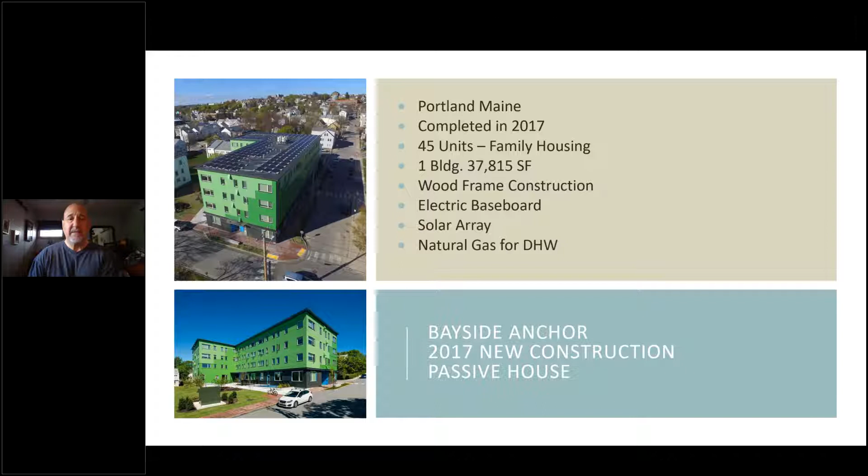So the first thing I want to show you is a building that was built in 2017. This is a passive house building in Portland, Maine. It's a 45-unit building, and it was the first passive house that was done in Maine, in Portland, and the first passive house certified that Avesta had built. And so after 2017 and 18, I tracked the performance. I wanted to look, if you can see on the top right, at the PHPP, which is the passive house estimating program, to see how much they estimated we would use in a year, and then how much natural gas we would use. That's for the hot water.

And on the left, I started breaking it down by cost per watt, by therm. This was what we were spending on electricity and for the natural gas. But where I highlighted is the most important for this conversation. We were seeing on average that each apartment was using about $69 or $70 of cost all in: plug load, heating load, cooling, and hot water.

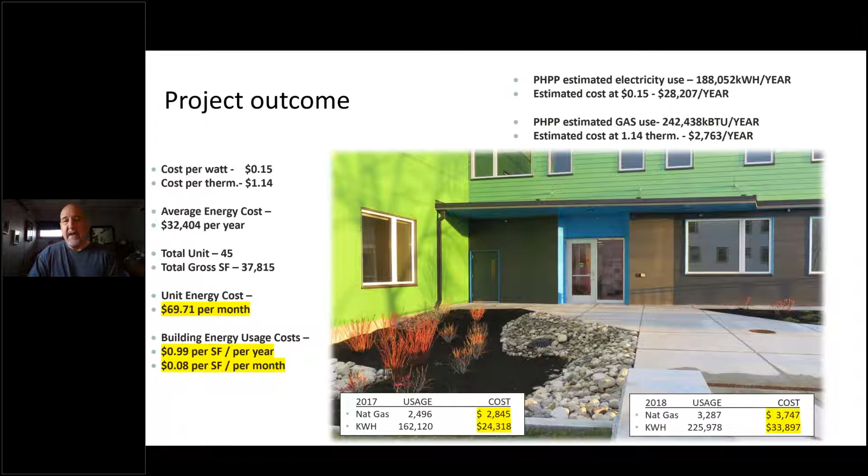If we break it down by square foot, it's about 99 cents per year or 8 cents per square foot per month. It was very interesting. So then I looked at another building. It was a different design, LEED. And this was in Gorham, Maine. It's a little inland, but basically it's in the same region, Maine.

And this has a different approach on how they model, but the goal is to be the same, reduce energy consumption. And in here, it's also electric for the heating; the hot water was natural gas. And when I did the math for the 2 years, 2017, 2018, again, $70 a month. This is a senior housing building. The other one was a multifamily. And about 88 cents a square foot per year.

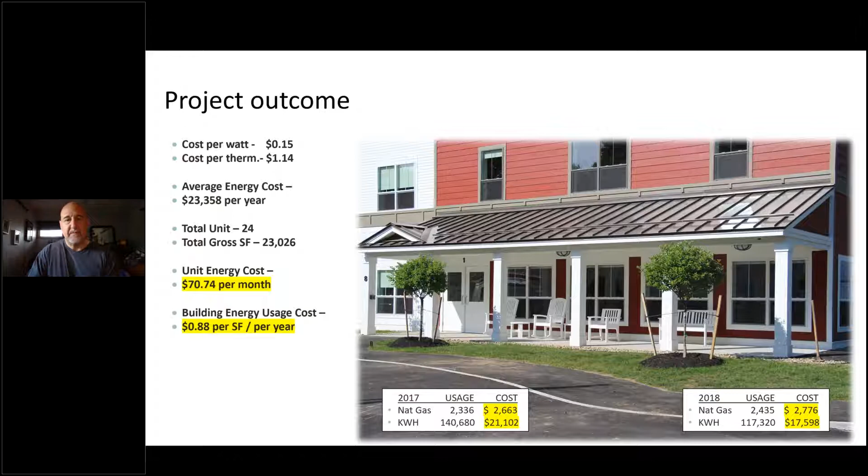And I said, well, what does that mean? These are nice numbers, but what does that really go against? Is it good? Is it bad? And so I compared those numbers of how I would operate both Bayside Anchor and Ridgewood 2 against the allowance from HUD, the US Department of Housing and Urban Development. This was done in 2019, this chart.

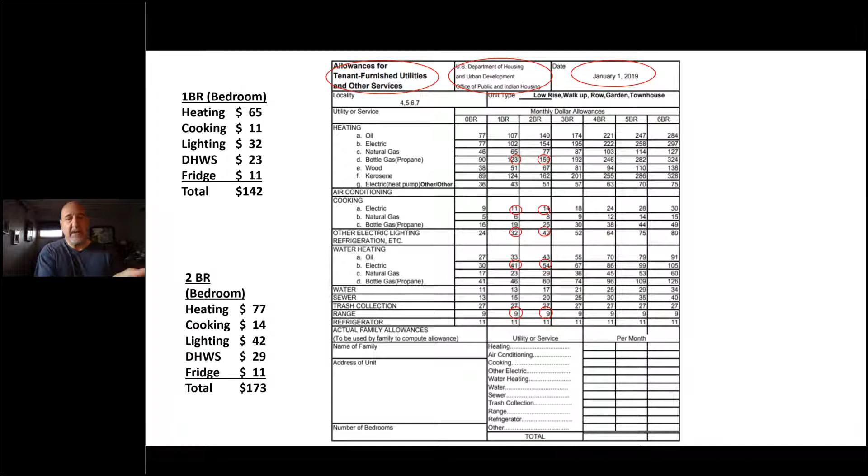What they estimate for an electric setup for heating, cooking, lighting, you can see it on the left. A one bedroom is approximately $142 per month. A two bedroom averages about $173 a month. That's the allowance that HUD would allow for somebody if it was an all electric building.

And as you can see, Bayside Anchor and Ridgewood 2 were half, almost a third of the cost of what the allowance was. And that's because HUD's information was based on the old way of building buildings. And Bayside Anchor and Ridgewood are based on the new way of building buildings.

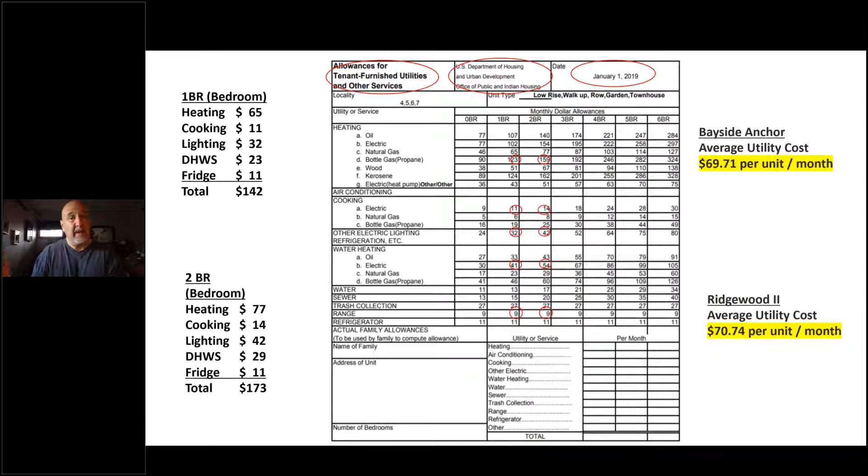So how are we going to compare the cost? Meaning I can see how Bayside Anchor works, I can see how Ridgewood 2 works, but can we compare all of our buildings? And also, how can we compare a good building versus a pretty good house or a code compliant? And so the Meadows at Grapevine Run fell into our lap. Of course, it was 3 years in the making, but this is a three building campus.

And the first of the three buildings was done basically code compliant. It had propane for heating and for hot water. It had nice insulation, double pane windows, pretty basic, but a good building. It was completed in 2017. In 2019, we were already in construction with two more buildings, exactly the same shape, size, square footage, number of units, but they were going to be passive house through PHIUS.

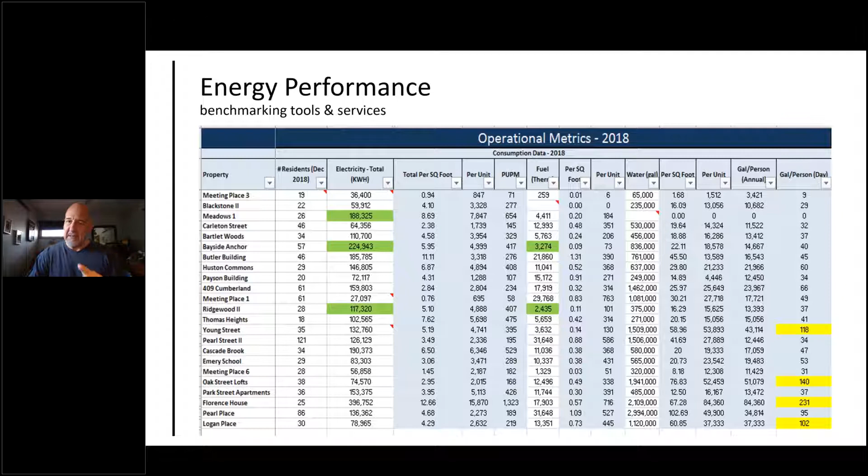We took buildings that were double corridor that were built over just a block of time to then start gathering the information on all of their metrics for operational expenses, square footage, electrical consumption, the hot water, the therms, the per unit cost, the water consumption, number of people living in it. We just started gathering information. And then we shrunk it down to 17 buildings over a 12-year period that were very similar in stature, double corridor buildings.

There are some that were senior, family, and Housing First. So they have different nuances. They're in different locations, but we just wanted to gather them to see what information we could find and how they compare with each other. As you can see on the left, in yellow, this is from the most recent at the time of this data mining, 2017, which means it was at least built and I had enough information to gather.

And the first thing we looked at was million BTUs per unit, and that's the middle of this document. But I want you to pay attention to the property names on the left, Bartlett Woods, Carleton Street, Bayside Anchor; they're all listed just by when they were completed. Over on the right, the building design: high performance, passive house, code, LEED. We categorized how these buildings were built based on the materials that we used.

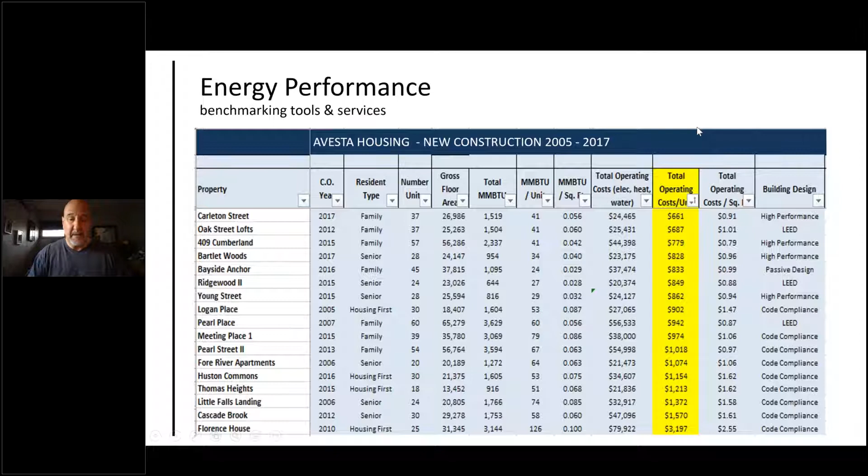And then finally, we wanted to show what is the total operating cost per unit. Same thing is going to happen. The properties change up and down. The numbers will show that high performance buildings perform 50, sometimes 75% better than the code compliant buildings.

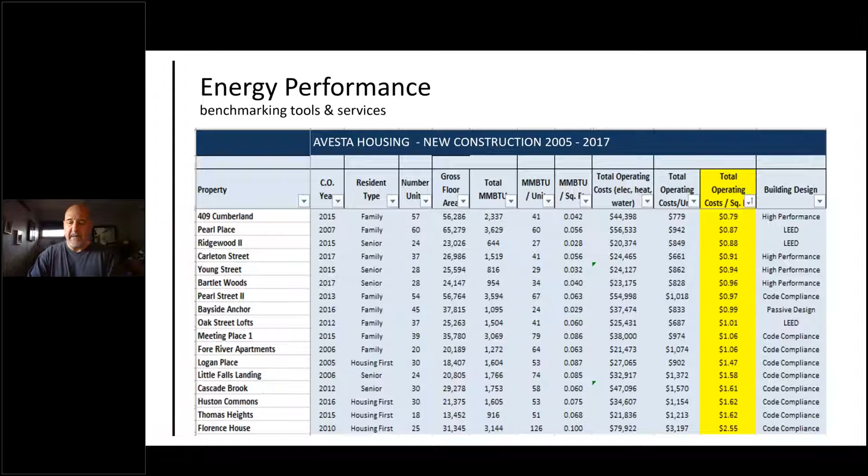So that was 2018, when I started doing this presentation. And I felt, how are we going to actually continue this story? Because one year could be an anomaly. And so, like I said, Nathan Howe and I have been staying at this for 3 years. And we have our own jobs to do. I'm busy with project managing and helping buildings get built. Nathan is a development officer, making sure that his specific projects are getting built. And yet, as we go back and forth to look at the data, we're learning new information. And so we wanted to see how they actually work over a period of time, and see if there's a difference. Maybe it was just an anomaly.

And so the first thing I'm going to show you is the energy performance of senior and homeless buildings over a 3-year period. You can see the buildings here are based on from 2018 to 2005. There's a couple of new buildings in this chart from the last chart, and a couple that came out. But these are all the senior and homeless. And the reason we did this is because we pay all the utility costs, so we can track it easier. So we wanted to make sure it was apples to apples, collecting this data sample of how they performed.

And you can see, as we've gotten more advanced, we're building more buildings to a high performance standard, but on occasion cost is king, and we couldn't afford high performance in this Huston Commons building, and it is what it is. We'll see how they perform. And we track by year, the number of units, square footage. Here's an important one, cost per square foot. And you can see it varies, but for the buildings in 2005, 2010, 2012, cost per square foot was lower. We're paying a little bit more money these days, well, quite a bit more money. And then the average, and they vary.

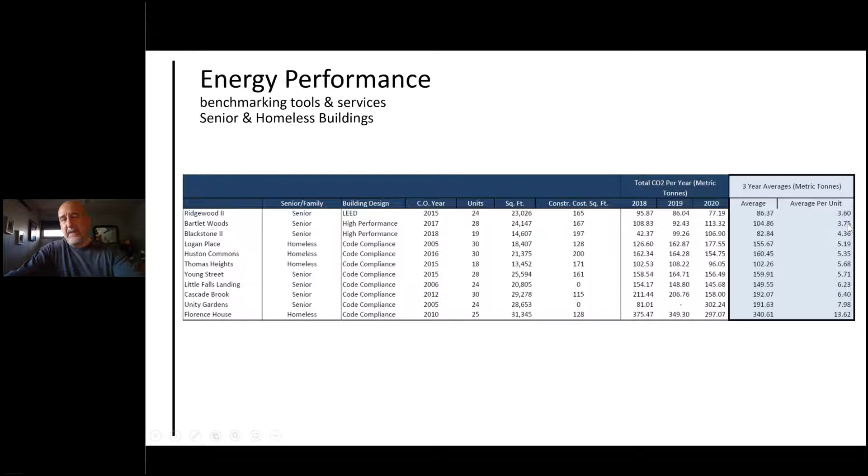And so we wanted to track, is there a difference? Well, of course there would be if we use more electrification, or more efficient heating systems and less fossil fuels. And so it's consistent that the higher performing buildings are producing 40%, sometimes almost 50% less carbon emissions, which is important.

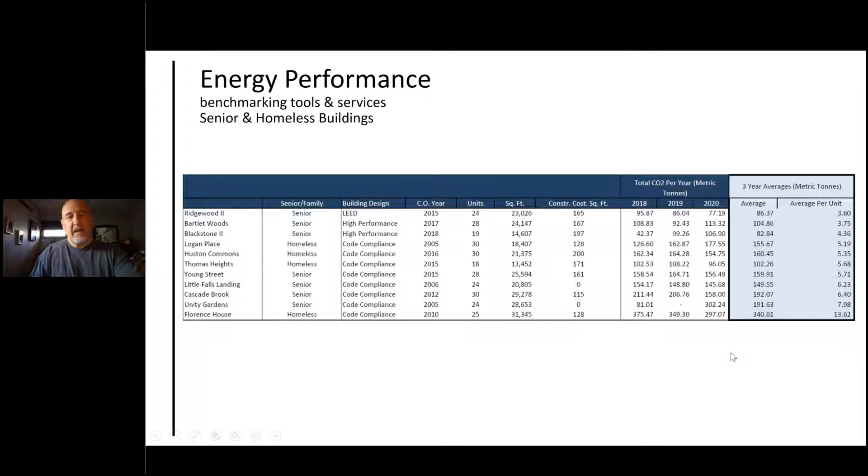Now we wanted to just track the family, and we're going to have similar results. This is just by year, and you can see high performance, Energy Star, LEED, code, they're all mix and match based on what we built that particular year from 2006 to 2019. When we just do per unit average cost, as you can see, all the high performance go to the top, and the code ones go where they belong. I'm not saying these code performers are bad, but I am saying high performance buildings are better.

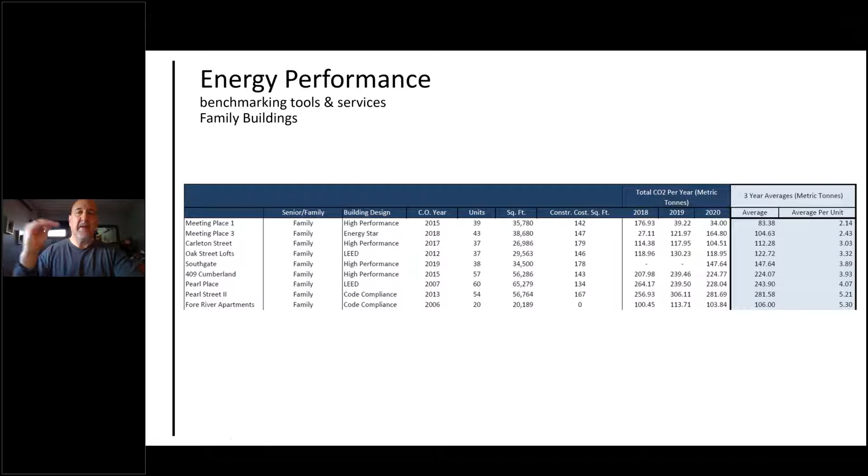And same outcome when you look at the metric tonnage being created. It's far less, 1.5 times, 2 times, 2.5 times less for a high performance building versus a code compliant building. We're doing our part.

And so, in summary, we needed to answer these questions. Can we prove that high performance buildings work? I say yes. Is it worth the money? It is worth the money. And I can answer your questions about the cost, if you have them. But I will say to this one, you spend a little more money, clearly. You recoup that money by the reduction in your operating costs. And when you add the resilience, the comfort of the residents, and the reduction in carbon, you're ahead.

Can we display the findings in dollars and cents? I think we did. I think you can also, if you do the same exercises that we did. I just want to leave you all with these questions that have been answered, and any questions that you have, I'd like to answer them as best I can.

Susan? This is Dean. I'll come in. Can you hear me okay, Todd? Yes, sir. Okay. Yeah, I'll sort of facilitate questions.

I think one last one that you might want to put down, one more box, for many in the audience, is: is this music to our ears? And I think the answer is another yes. But I maybe want to ask Rudy this. So I have a question. It looks like Bob had a question, and it looks like he started to type it, but I don't see the full question. Oh, here it is. Hold on. Let me just pull this down.